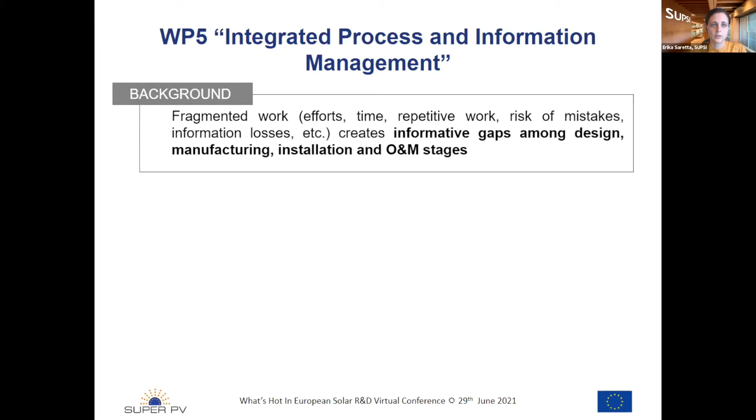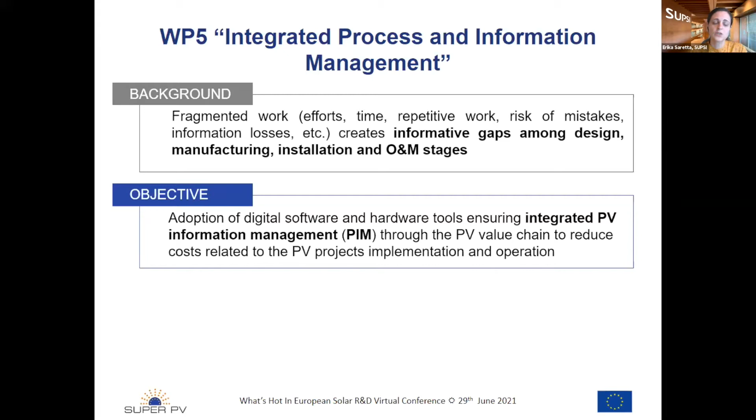And this is exactly the goal and the topic of work package 5. Indeed, we observed a fragmented process in the PV value chain that creates informative gaps among design, manufacturing, installation, and O&M stages. And these gaps involve also huge efforts, extra time, repetitive work, risk of mistakes, information losses, and so on, that cause extra costs along the value chain. And for this reason, the goal of our activity is to adopt digital solutions and tools to ensure an integrated PV information management. We named it PIM, and the goal is to reduce the costs and also extra costs related to PV projects implementation and operation.

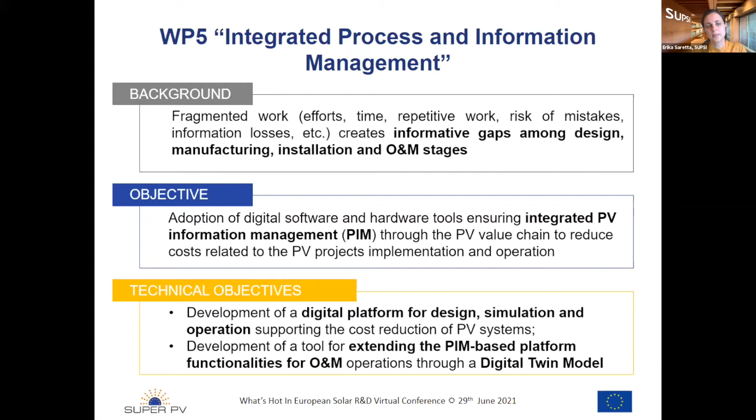Translated into real terms, this means for us the development of a digital platform for design, simulation, and operation, supporting the cost reduction of PV systems, but also the development of a tool for extending this PIM-based platform for the O&M through digital twin models. Maybe now you are asking, what is PIM? Let's say that PIM arises from BIM, that is the acronym for Building Information Management. This is a digital and collaborative approach based on building data sharing among different stakeholders and different stages of the building process. And this approach involves modeling not only the geometries, but also information associated with objects and geometries. And it has been demonstrated in the building process a dramatic reduction of time and efforts, mistakes, and extra costs, thanks to this approach.

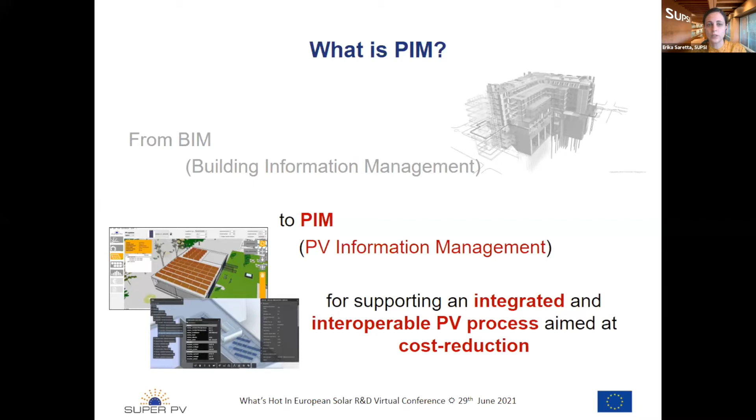So we adapted and tailored this approach to the PV industry by introducing also here a collaborative digital approach that we named PIM, or PV Information Management, for developing this integrated and interoperable PV process aimed at overcoming these informative gaps that I mentioned before for supporting the PV cost reduction. In SuperPV Project, we developed this PIM strategy that actually takes in three main work stages, which are the manufacturing, the design stage, and the O&M. And we envisioned digital sharing of data and information among these stages. So indeed, from manufacturing, PV module data can be used for design and simulation, as usually it is already done.

Then when the PV plant is built, we will have the as-built model. But this as-built PIM model is not only a geometrical model, but it also embeds information about the PV components that are used. And this model with embedded information can be directly used in the O&M stage.

During the O&M stage, by monitoring the performance and the behavior of the PV plant, we can also provide feedback to the simulation model, so we can improve the simulation model thanks to real data and the real behavior of the PV plant, to improve the design of future PV plants, and in this way also reduce the costs of future PV plants.

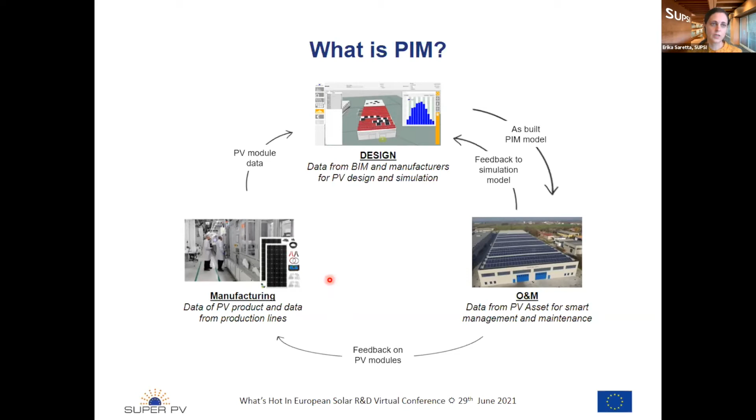But also we can collect data about the real behavior of PV modules, and we can provide feedback to manufacturers on how to improve the PV modules to improve the efficiency and also reduce the costs. So in this way, the loop is closed, and as you can see here, the information can flow from one stage to another one, and also provide insights and more knowledge to improve the process and the different steps.

So translated into real terms, the PIM has been implemented within the SuperPV Project through a set of tools and software, and in particular SINTEF, and in particular Xiang, is developing the data mining tool for finding correlations among PV module properties and manufacturing steps that are going to affect the CapEx.

We also have a first prototype of a SuperPV tool for cost-driven design that allows reducing time in design, but also creating a model with this embedded information that can be used in the O&M stage, where we will have two digital twins, one for the product lifecycle management of PV modules, and the other one for the smart O&M, so for the smart management of the PV plant, which allows reducing the OpEx.

And finally, we have a data mining tool that is going to be developed for finding out the correlations between product performances, properties, and the events that appear or can appear in the infant stages. That is also going to affect, in this case, the CapEx, thanks to the feedback that will be provided to manufacturers.

There are several typical failures in different stages of the wafer-based crystalline PV module when they start operation. The curve here is taken from one of the reports, from other people's work. There are typical problems due to the delamination here, and also some of the problems could be the material used to seal the panel, like the EVA material here.

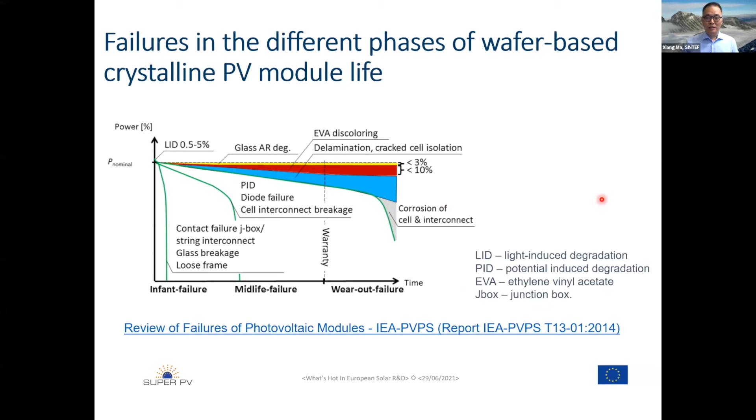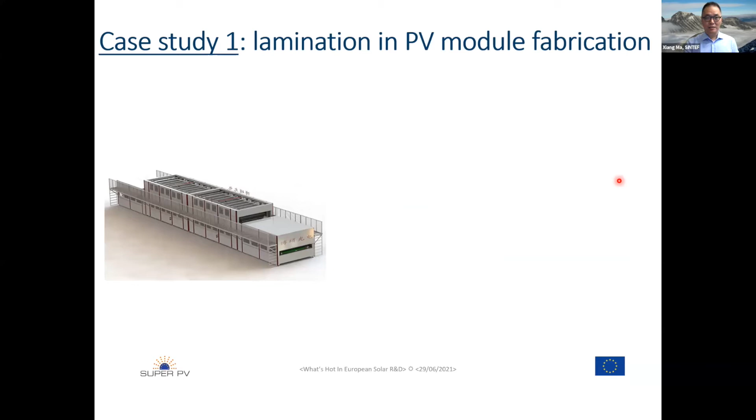Anything could happen and impact the PV module life. In this talk, I would like to focus on the scenario. One is the lamination. Lamination is a very important process in manufacturing the PV module, and maybe the most important one, because once you've done the lamination, the process cannot be reversed. Before lamination, if something happens, like if you find a cracked cell, it can very easily be replaced.

But once you finish the lamination, everything is sealed and cannot be fixed. And this lamination also provides the panel durability. During the lamination, one of the critical process parameters is temperature. The temperature is used to heat up the layers to melt the EVA material, etc.

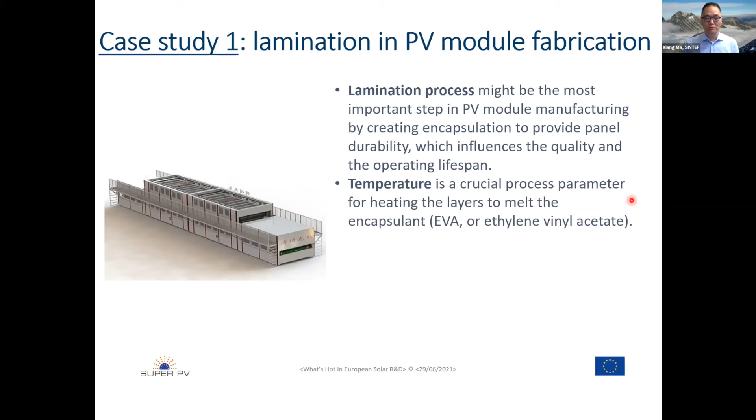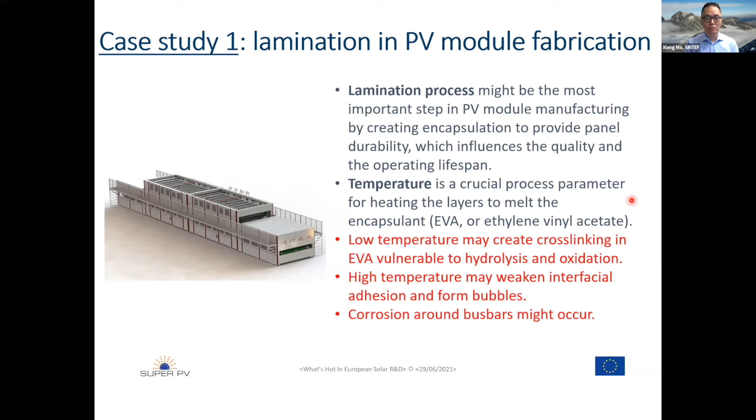Low temperature could affect the cross-linking of the EVA polymer and make the material, the panel, easily oxidized and subject to hydrolysis. And if the temperature is too high, it might weaken the interfacial adhesion and a lot of bubbles could be created. So it's very critical to control the temperature. Also, if something bad happens, it can create corrosion around the bus bar. So it's important to keep in mind that temperature control is important.

The next slide is taken from the data collected during the manufacturing process, and this data was provided by Solitek, a partner within the SuperPV consortium.

And in the previous slide, it's a dual laminator. This laminator can laminate two panels at the same time. See here, we call them chamber 1 and chamber 2. The temperature varies over a long time, over one night or over one day. And see, there are a couple of positions that collect the temperature data.

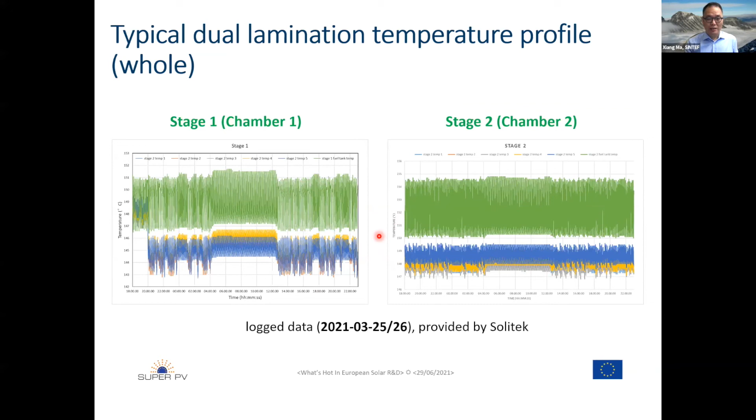You see the bottom plots, and somehow they are a little bit different. And the top one, you can see the tank temperature. They also vary to some degree. It's important to analyze the variation. In the next slide we took from the plot the temperature curve in a very short period of time, like 40 minutes. And see here, the two stages have a different temperature variation, slightly, I would say 2 or 3 degrees difference.

But how this is important is that we have to combine it with other analysis, like using the flash test results, and also possibly analyzing the electroluminescence image. You have to identify some of the defects, and these defects could be caused by the temperature variation in lamination.

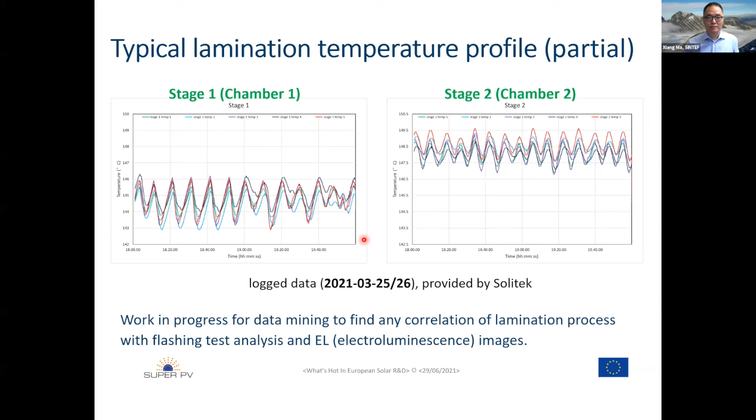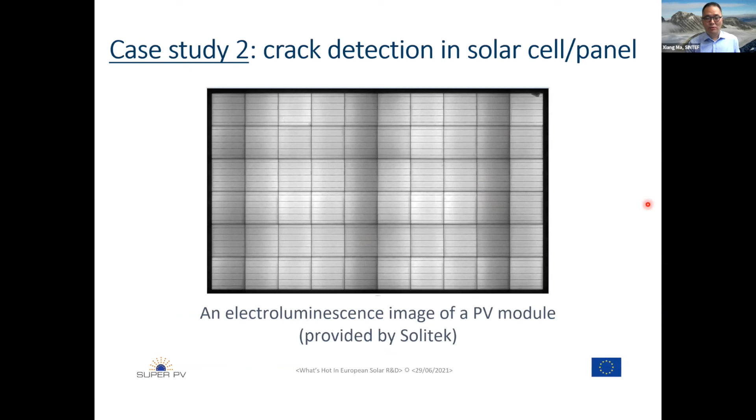The second case we would like to present is crack detection using image processing techniques. Here is the PV module, the image from the electroluminescence scanning, also provided by Solitek. And the panel here is quite clean, almost nothing. So we should be happy that even when we run the crack detection, it shows nothing.

But in this case, we use the code to process one cell with a very obvious crack here. On the right hand side, in black and white background, the crack is very obvious, but we have to label the crack as a reference. And the left hand side is from the EL scanning. We acknowledge the original source code is from the Pattern Recognition Lab developed at FAU, the university in Germany, and we adapted that code to suit our purpose.

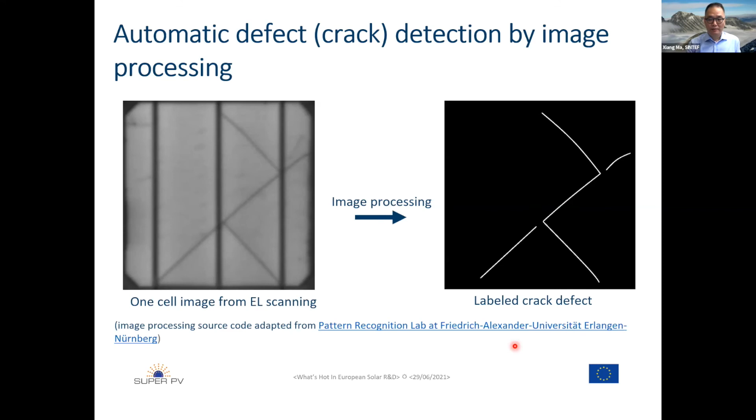This slide shows the result using image processing on the cell shown in the previous slide. Here we have a region of interest, and the big vertical black lines are the bus bars. Due to the low resolution, we cannot see the tiny grids, but the obvious crack is definitely showing in the picture. We ran several techniques, before filter and after filter, maybe not a big difference. But if you run the equalization, you can see some of the details.

But some of the tiny details, according to the reference in the previous slides, are not correct. And if we use a different algorithm, we can look further and identify some very tiny, I would say minor, defects that are not easily detected by our eyes.

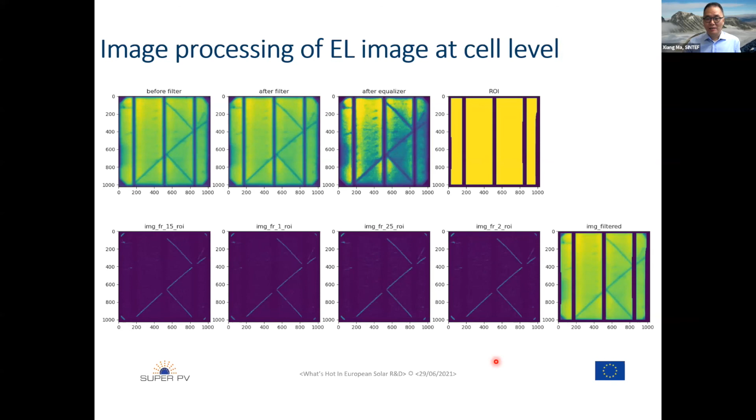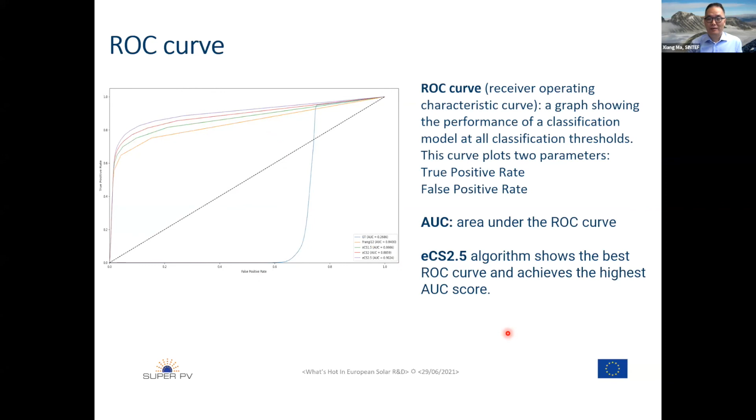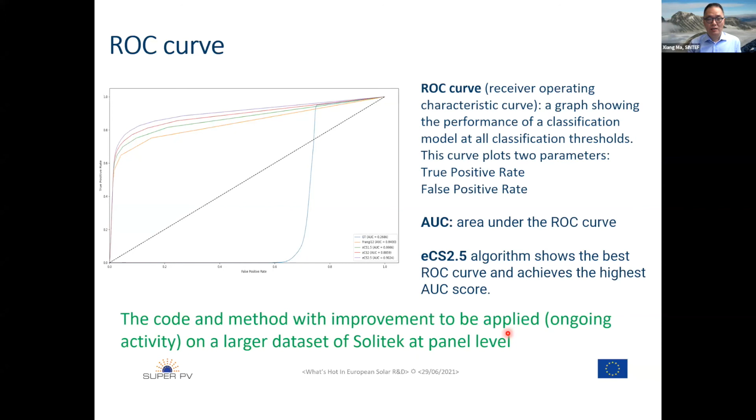Yes, and we are still improving the source code to process at the large scale of the module level. Before, it was only the cell level. And then we can recommend a workflow. See here, we identify the two.

1 minute, Xiang, please. Okay, I will be done in 1 minute.

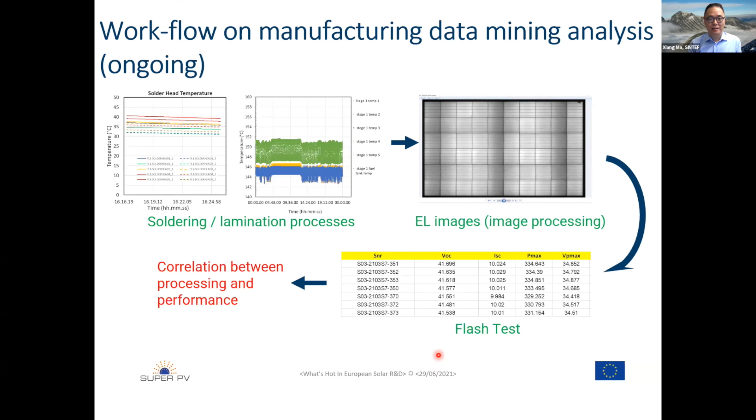We identify the critical process steps like soldering and lamination. They are crucial during manufacturing. Now we have EL imaging before and after lamination, and then we run the flash test to get all the performance data. We try to link the processing and the performance to create the analysis for the panel once in the operation stage. That's all. Thank you very much.